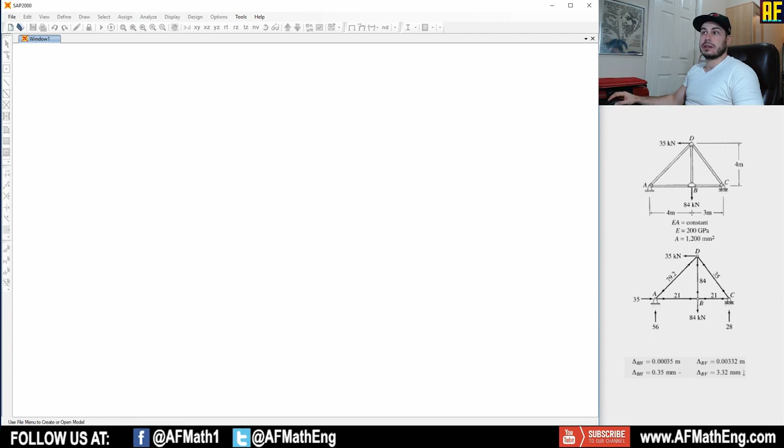So we have a truss here on the right-hand side of the screen, and this is the truss with the loadings. We have 2 point loadings here, 35 kilonewton at D and 84 kilonewton at B. We're given the modulus of elasticity. We're given the cross-sectional area of the members, and that is essentially it. We're also given the solved truss with the reactions. We have the forces in the members, and we have the deflection at B. So I'm going to show you how to get all of those things really quickly in SAP 2000.

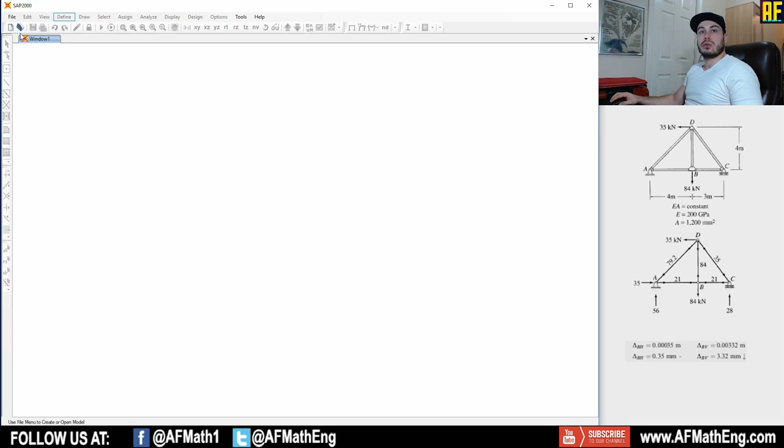So first we're going to go ahead and start our new model. So File, New Model, and we're going to go to Grid only. Now, if you haven't watched our other video on beams, I highly suggest that you do that because I might go a little quickly through these just to make the video shorter. So go back and check out that video if you haven't done it already. That was our first video.

But we're going to start with our grid lines. If you'll remember in the other question, this is our XZ plane here always. So when we're looking at it as it's presented to us in the book, the horizontal axis along the page there is x. Up and down here is z, and into the page is y. So that's the coordinate system in SAP. So for our grid lines here, this is a good trick because there's 4 meters and then 3 meters.

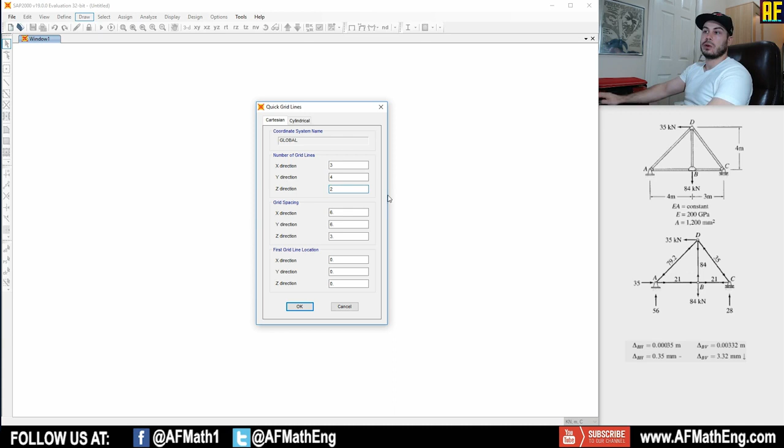So let's first select the number of grid lines. We have 1, 2, 3 grid lines here. And in the z direction, we have 1, 2 grid lines. And in the y direction, we don't have any grid lines. This isn't going into the page. It's like a 2D structure, so we'll just put 1 there. For the grid spacing, this is a little bit of a trick here. I'm going to put 4 for now, so we're going to have 4 and 4, and then we're just going to edit it right after.

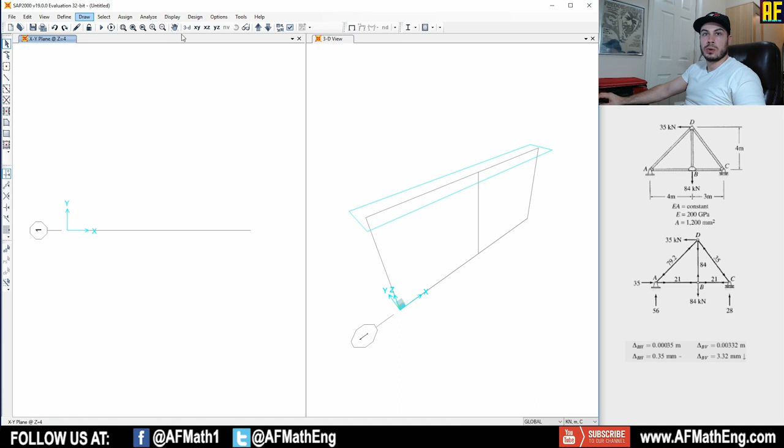Y direction doesn't matter, and for Z direction, we do have 4 meter spacing here, so we're going to want to put 4 meters for that. So press OK, and once again, we have our XY plane and our 3D view. So let's get out of the 3D view and go to the XZ plane because that's how it looks on the page, XZ.

And as you can see here, we have 4 meters and 4 meters here, and that's not what we want. If you take a look at the bottom down here, that'll show you that we have x equals 4 and x equals 8, but we want x equals 7, right, because it's 4 and 3.

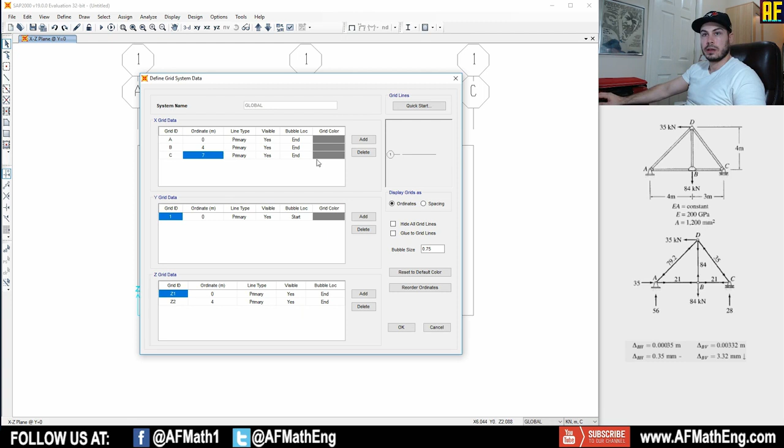So just right-click on the screen and click Edit Grid Data, and you're going to see the global system there. Click Modify, and here is our x grid data. So we have A, B, and C. We want to change this from 8 to 7. So I'm just going to double-click on that, highlight it, push 7, and then press Enter to apply that, and press OK. And as you can see, now we have x equals 7 here. So that's what we want.

So let's go ahead and start by defining the properties of our members. We're going to go to the first step always, and we're going to define our materials. So let's go to Define. We're going to hit Materials there, and let's add a new material. Let's just press OK. This is all fine. And we're going to modify that material that we just added. Let's say this is truss. Once again, our unit weight is 0, weight per unit volume, always assumed in these books unless specified, for the structural analysis stuff.

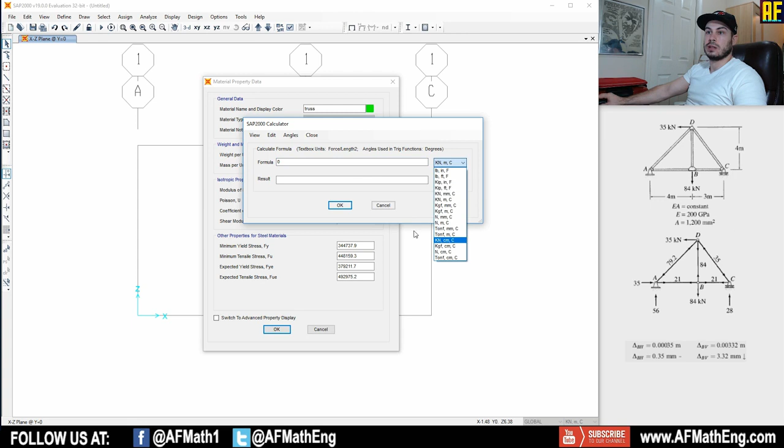Modulus of elasticity is going to be, we have 200 GPa over here, so 2E08. And like I said before, if you're not sure what it is in those units, you can always do the shift double click, bring the calculator up, and input the GPa in the units that you would like. So that's good to know. What else do we have here? That's everything for this page. Let's press OK. Our material is defined. Let's go over to section properties now.

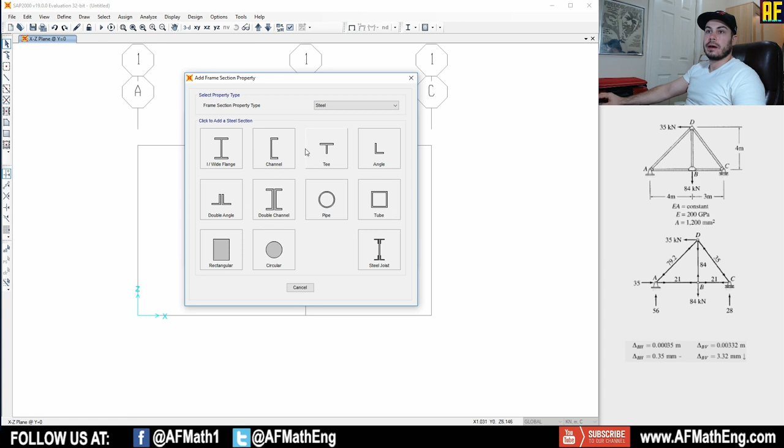So we're at section properties, and let's go ahead and click frame sections again. And now we're going to add a new property. For example, if this is like a steel design course and you're given the shape, maybe these are steel angles or something, you can import them using these presets here. But we are just given the area. That's all we care about here. So in that case, we're going to go to Other and go to General.

And we're going to define our cross-sectional area, right? Because these are tensional members and compressional members. There's no bending going on within the truss and the members, so we don't care about the moment of inertia. All we care about is the cross-sectional area. So within the cross-sectional area here, we're going to put our value of 1200 millimeters squared. As you remember, though, we're in kilonewton and meters here. So we do need to bring out our calculator and put that into millimeter. It doesn't matter what force unit you select. Just make sure you select a millimeter unit here.

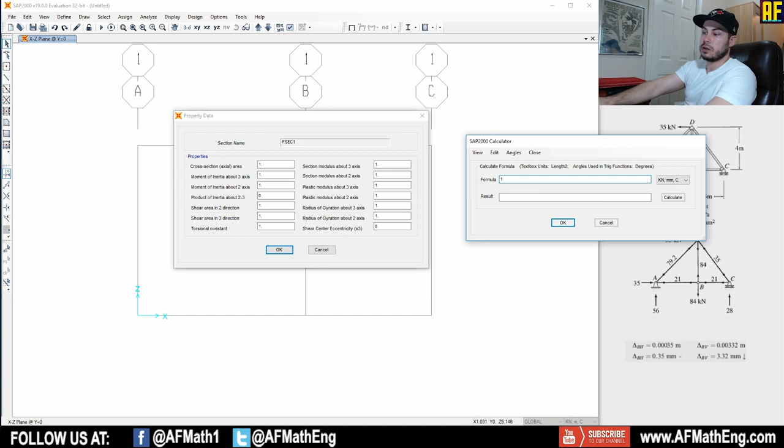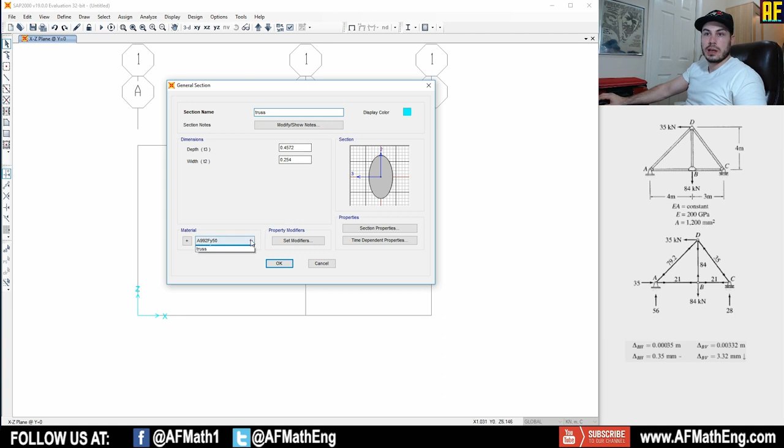And we're going to put 1,200. Let me just move that out of the way for you. We have 1,200 millimeters squared. And SAP, once we press OK, is immediately going to convert that to the units that are specified down here. As you see, we have kilonewton and meters, so we have a meter unit. All right, so that's everything here. Press OK. And let's rename our section to be truss. And our material, let's select truss, that material that we selected there, and press OK.

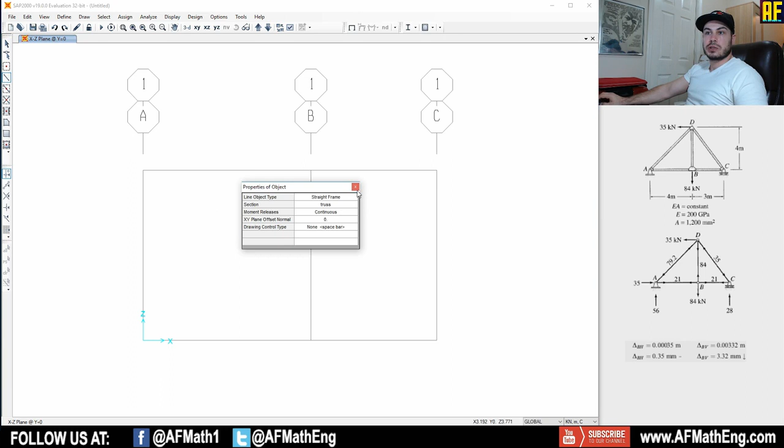And finally, we're going to go to Define, and we're going to go to our load patterns. And we're just going to make the self-weight multiplier 0. I think that's a good habit to get into. And if you don't know why I did that, go back to the last video. I explained it there. Now that we've done that, we're pretty much ready to go. So we're ready to start drawing our truss. As you get fast at this, this is a great way to check your answers. It doesn't take very long to input these trusses into SAP and really double check that you're handing in the right thing.

So like I said, something I wish I had in second year, but that's why I'm showing you guys. So make sure that you've selected truss for your section, the one that we just defined in our frame sections, and start to draw the truss exactly as you see it here, stopping at every joint.

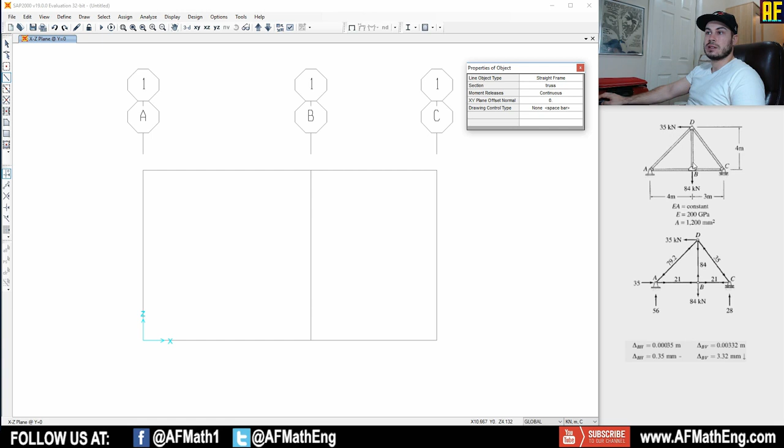Okay, so we're going to go from point A over to point D, over to point C. Okay, we're going to go to B. I'm going to go over here to D. Not the best way to do it. Right click to end it if you kind of messed up like I did there, and go from A to B. And we've started to draw the truss here.

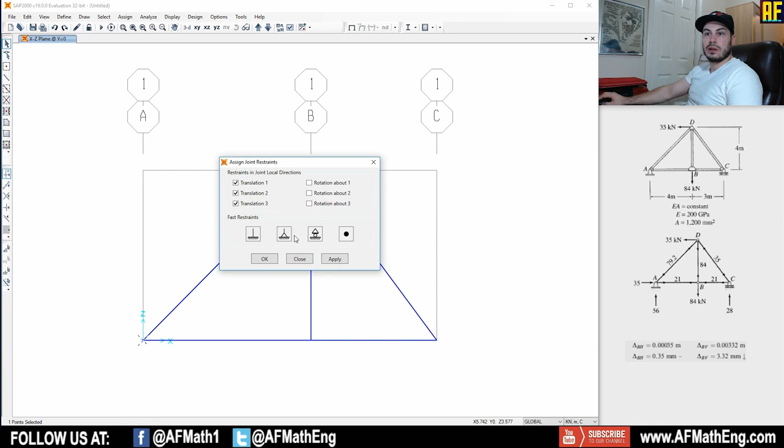Now let's go ahead and assign our restraints. We have a pin and we have a roller there. So a pin at A. Let's go ahead and assign a joint restraint. Okay, and we have a pin. Select the pin, press OK. Go to C. Okay, assign joint restraints. Select the roller, press OK. And now our restraints and our supports are assigned.

Let's go ahead and assign these loads now, these point loads. So as you can see, we have a 35 kilonewton point load at D. It's going in the negative X direction. So we're going to go to assign, and we're going to go to joint loads and forces. And we're going to go to the global X, and we would like to assign a negative 35 kilonewton force. It doesn't matter what option you have because there's no other forces at that point. Okay, so as you can see, we have a 35 kilonewton point load there.

Go over to B. We have our negative 84 in the Z plane. Remember, ZX, okay? Assign a joint load there in the Z. Don't reassign that. Make that 0. I don't know why SAP does that. And we have negative 84. Okay, press OK. Very good.

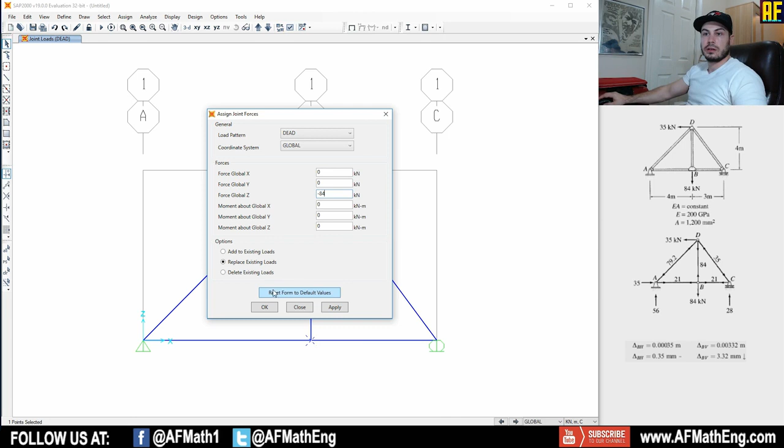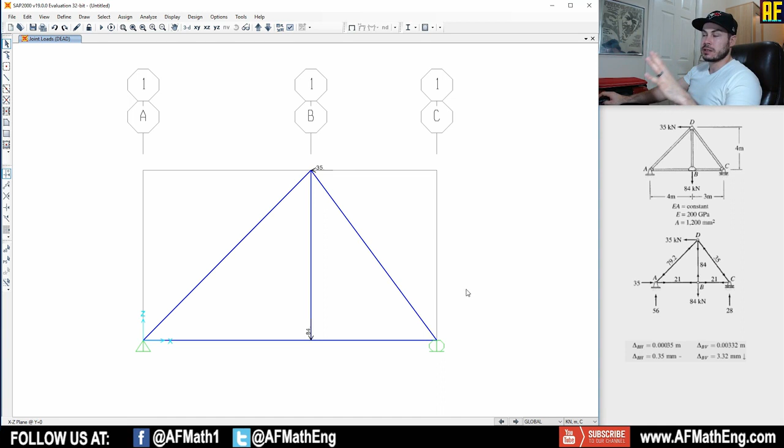Now, you may think that you're done in this case. But you have to remember, and this is the key thing to remember here in SAP, is that these are all considered to be rigid joints here. So they're restrained against rotation. They're fixed joints, and if you were to analyze this like this, you would analyze it as a frame with rigid joints, and you're going to get something completely different, and you're going to be wondering what's going on here. So what you do need to do is you need to release all of these joints against rotation. Essentially you have to make them pins.

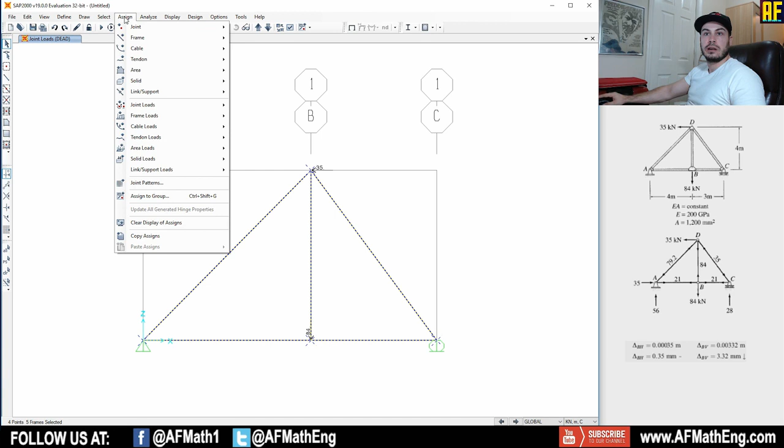And how we're going to do that is we're going to select our entire structure. We're going to go to assign, we're going to go to frame, and we're going to go to release/partial fixity. Double click on that, and that's going to allow us to select the start and the end of each member and release them against moment. So essentially we're going to release the restraints against moment here.

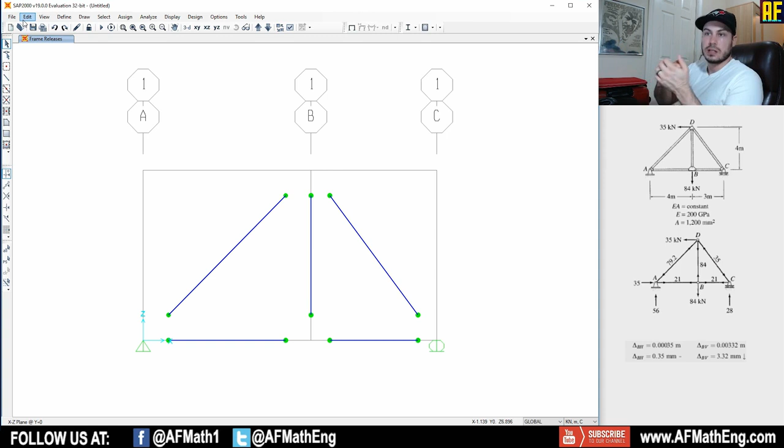And as you can see, we have 0 moment on the ends of all of these, which essentially means that it's pinned on the ends. We're going to press OK, and you can see these little green dots come up. So that means that our end members have been released against rotation. They're allowed to rotate now, so these are all pinned members, and it is now a truss that is pinned. As you remember, trusses are always pinned. And now we can go ahead and start to analyze this structure.

So we're going to go to Analyze, and we're going to run this analysis. We're not going to run a modal analysis. We're only going to run our dead load analysis, so our linear static analysis. We're going to run now, and let's go ahead and rename it whatever. Save it. And as you can see, we now have our deflected shape of our truss, and we can start to analyze. Let's compare what they got in this question to what we got. So let's go over to show forces and stresses. Let's take a look at the reactions first.

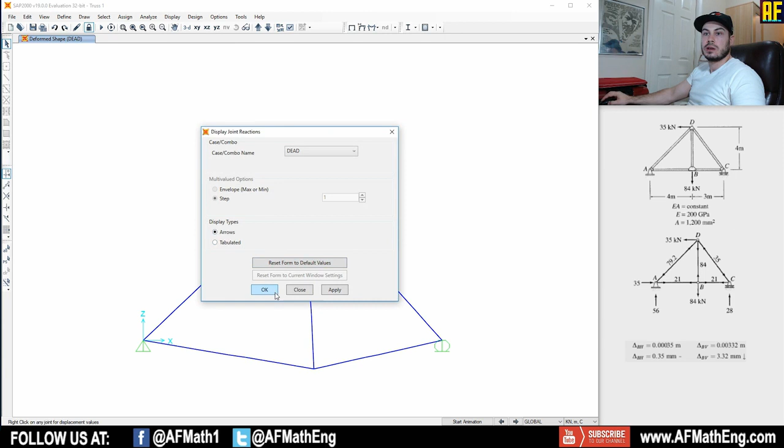And as you can see, we got a 56, 35, we got 28 up, and that's exactly what they have for the reactions here. Very good. Now, as you can see in this little check mark box, we have set display options. Let's click on that, and let's go label the joints, and let's also label the frame section. Okay, we're going to label the sections here, and we've also labeled the joints.

So when we look at, for example, which member is which force in our table, we're going to know which one's which. So let's take a look at these forces in each member, and I'm going to show you how to do that. I'm also going to show you at the same time how to find that deflection. So go ahead, go to Display, and go to Show Tables. Okay, so you're going to go to Show Tables, and you're going to see that this screen comes up. Okay, so we have Choose Tables for Display.

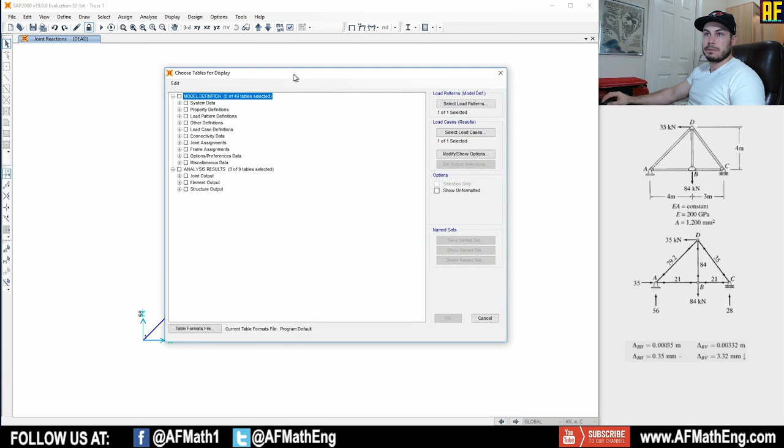And if we go to Analysis Results, we can take a look at, for example, the joint displacements. So you can go ahead and maximize these little boxes here. So we want to take a look at the joint displacements because we want to look at what the displacement is at B to compare. We also want to take a look at the member forces. So let's go to Element Output, and we're going to go to Frame Output, and we want to go to the Element Forces. Okay, so you can select whatever you want.

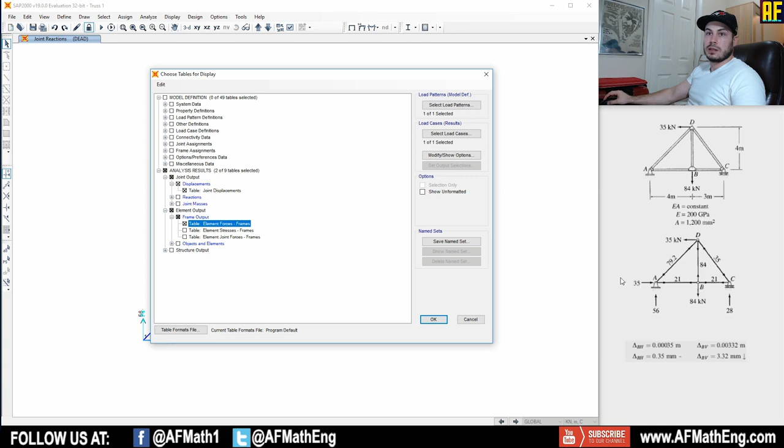You can look at the stresses, the joint forces. There's a lot of different things that SAP will output for you. But for this one, we just want to look at the element forces, and we want to look at the reactions and the joint displacements. So go ahead and push OK, and what's going to come up is a table here. And this is why we went ahead and we labeled the truss, because now we can take a look at what it corresponds to. So let's go ahead to joint displacements first.

And as you can see, if we go over to joint 4 here, okay, just put this here for you. Okay, so if we go over to joint 4, which is B on the truss, they got for the horizontal displacement 0.35 millimeter to the right and 3.32 millimeter down. And as you can see, if we go to joint 4 U1, which is the 1 axis, so that is the X direction, that is 0.35 millimeter. That is correct here, and this is in meters, but that is correct.

That's the right direction. And then we have negative 0.00332, or they actually have more decimals here, 0.003315 down displacement at joint 4, which is joint B in our question. So there, that's exactly correct, exactly the same thing that they got here. Let's go ahead and take a look at the element forces.

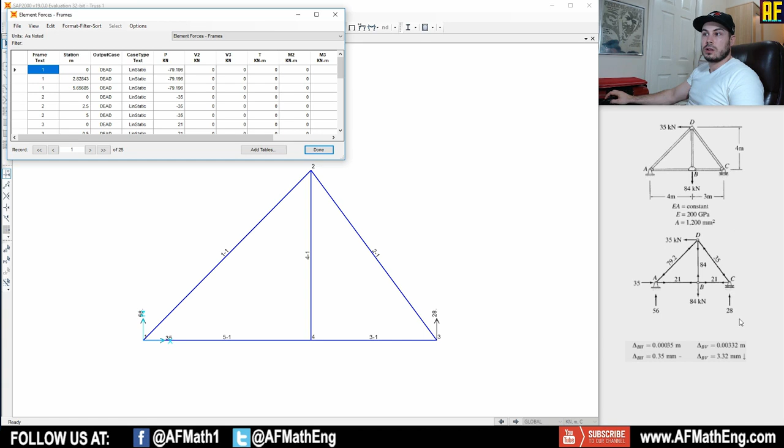And as you'll see, frame member 1, we have a compression of 79.196, 79.2, they rounded it here, and 35 compression for, yes, okay, so that's all good. So we have 79.2, 79.2, 35, 35, we have 21 here, that is member 3, 21, okay, cool. And the directions are included. We have negatives and positives corresponding to compression and tension. And there you go. That's pretty much it.

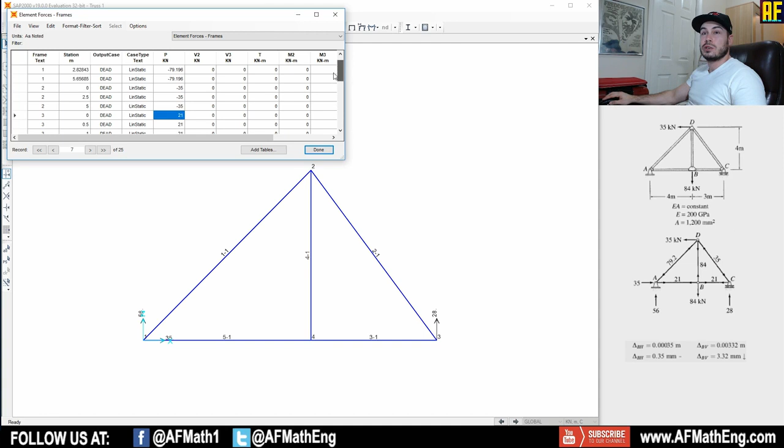So these tables can be exported, not actually in the evaluation version. You need the full version to export them to Excel. But this is a great way, like I said, if you have that really important assignment that you're going to need to check, make sure that all of your forces and your displacements are correct before you hand it in. This is a great way. Just throw it in SAP. Once you get good at it, it'll take about 5 minutes or so.

And you can really benefit from this in your engineering studies, especially in second year when you're doing all those statics courses. So I hope you learned something from this. I hope you learned how to input a truss into SAP 2000 and how to get the outputs that you so desire.